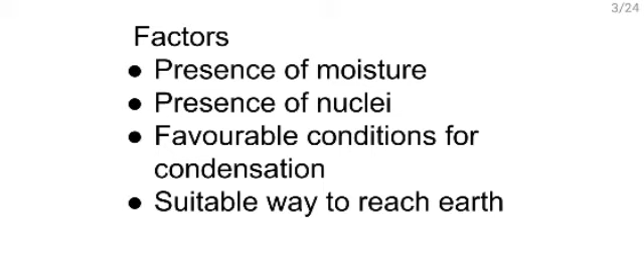This is front. I have said about favorable conditions, so one among them is front. Front means cool air from one side and warm air from the other side. They meet at a point where rain can happen - the interface of warm air and cool air. Northeast trade winds and southwest trade winds meet at some front, and there rain can happen. So we have to do weather forecasting, where people go on checking for wind directions.

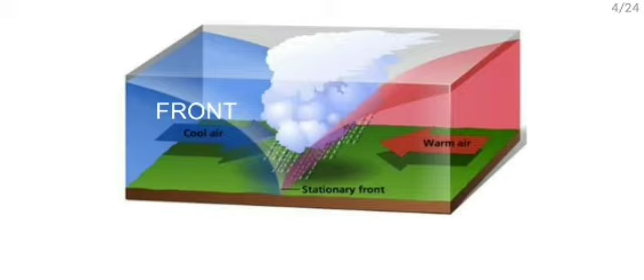Cyclone means a low pressure region or depression. At the center there is a depression around which winds are circulating. At the center, thunderstorms, rain, etc. can happen. So during our monsoon season, these depressions are formed in the Bay of Bengal and Arabian Sea, and they travel from southwest to North India as two branches - one along the western region and the other from Bay of Bengal - both meeting at Delhi. This is the monsoon, an example of a depression traveling and causing rain.

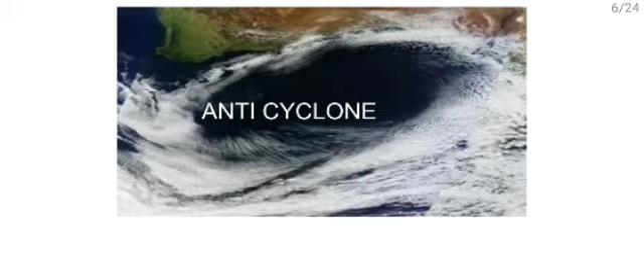Anticyclone means we have a high pressure region at the center with wind circulating. Orographic precipitation is when clouds moving with the wind encounter mountains that form a hindrance, and trees on them can make the moisture come down as rain. That is orographic.

With that, we have completed the factors. Now the whole hydrologic cycle takes place due to heat energy originating from the sun. We know the law: energy is neither created nor destroyed, so there should be a balance between the total heat energy used. Just look at where all this is used. There is heat transferred from the water surface to air, and some amount of heat energy is used for evaporation. Some heat is lost into the ground, some heat energy is stored in the water body, and some heat energy is transferred by the water flowing. So we have heat energy stored in the water body, lost to the ground, transferred by water runoff, and some used for evaporation.

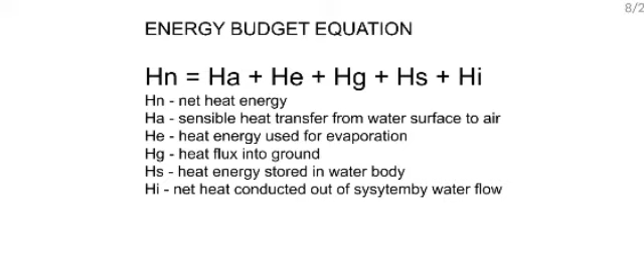This is the hydrologic budget equation - earlier we talked about energy, now mass. Mass here means water only; the whole amount of water throughout should be the same, since matter can neither be created nor destroyed. So if we take a particular area into consideration and look at the total amount of rain coming down, some is stored within the area, and the remaining we have as surface runoff, subsurface outflow, and actual evapotranspiration. So this is the hydrologic budget equation.

So I have told both of these to give an idea of where all the energy and matter is distributed. These have a prominent role in estimating the amount of rain we'll be getting, or estimating the amount that will be evaporated, and so on.

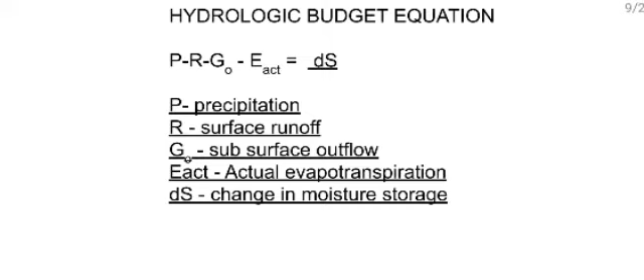Next is depression storage. We have pits all over our ground, and water stored there gets evaporated as such. In roads and all, we have none.

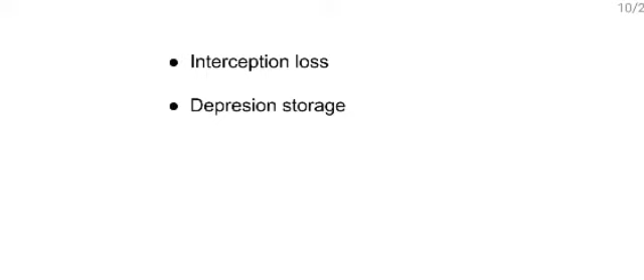Next is infiltration. We have the water quantity distributed as runoff, depression storage, interception loss, surface runoff, ground subsurface outflow, and so on. That flows through evaporation during rain or during interception loss and all. So some amount of quantity of water penetrates into the ground - that is infiltration.

In this diagram, if sufficient quantity of water is there, it will go deep into the ground to the wetting zone, depending upon the quantity of rainfall. First is the saturation zone - water coming as rain penetrates into the ground. The first layer of saturation goes to the second layer, which is the transition zone. There, water is transmitted from the saturation zone to the transmission zone, next to the wetting zone.

Wetting front - so wetting zone, wetting front - that means there should be some rock strata beneath the ground wherein this water will be collected. That interface is called the wetting front, and where the water is collected is the wetting zone. I think you are getting an idea.

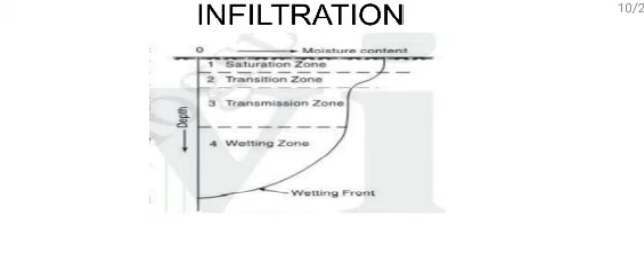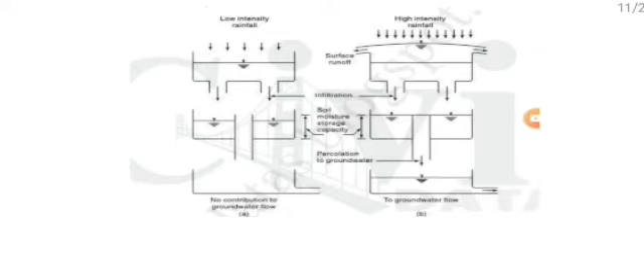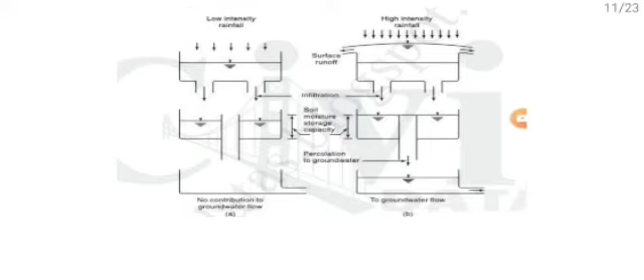Water penetrating into the ground depends on the intensity of rainfall. This picture shows how infiltration depends on the intensity of rainfall. In figure A, we have a low intensity rainfall. There, water first gets into the soil, and if it reaches the saturation level, it will move on to the transmission zone, then it is transmitted to the groundwater flow - but if the soil is not reaching its saturation capacity, there is no contribution to groundwater flow.

Next, in case of high intensity rainfall, water percolates into the soil and gets saturated. After it reaches saturation capacity, it moves to the transmission zone, then to groundwater flow.

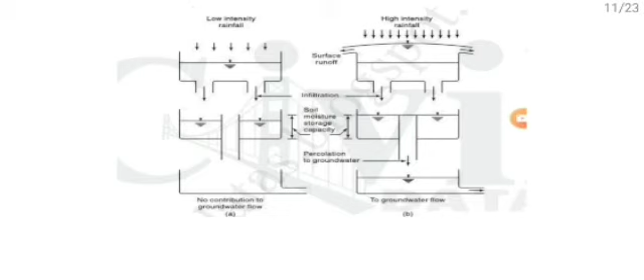Now the factors on which infiltration depends are the soil condition, vegetative cover, current moisture content, and type of soil. Soil condition means whether the soil is permeable and loose, which will allow infiltration, but if it is dense and impermeable, it will not enhance infiltration.

Vegetative cover actually increases permeability of soil, hence infiltration will take place at a larger rate. Current moisture content means, for example, if the considered soil is saturated, it will allow no more entry of water, so infiltration will be low. Then type of soil - as already said, whether it is clayey soil or sandy soil and so on - and the organic content of the soil, etc., everything will affect it.

Here, infiltration at capacity rate - so what is this capacity rate? Infiltration capacity rate is the maximum amount of water that the soil will allow to infiltrate into it. That is what they mean by infiltration capacity rate.

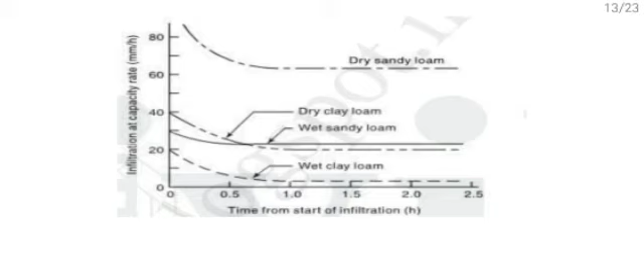Dry sandy loam has the maximum infiltration capacity rate, then we have dry clay loam, then wet sandy loam. The infiltration capacity rate of wet sandy loam is even lower than dry clay loam, because saturation inhibits infiltration. Then comes wet sandy loam, then wet clay loam.

Next is Horton's equation, a technique used to measure infiltration. There are other techniques too, but I'm mentioning this one so we get an idea of infiltration. Actually, it takes place at an exponential rate, as we've seen from the graph - with time, it decreases. So infiltration at any point of time, small fp, is Fc plus F0 minus Fc into e raised to minus kT, where F0 is the maximum infiltration.

At any point of time, that is given by small fp. This capital Fp considers the amount of water infiltrated till now, the cumulative quantity. It is important because it tells us what quantity of water has infiltrated into the soil - that is what we have to consider.

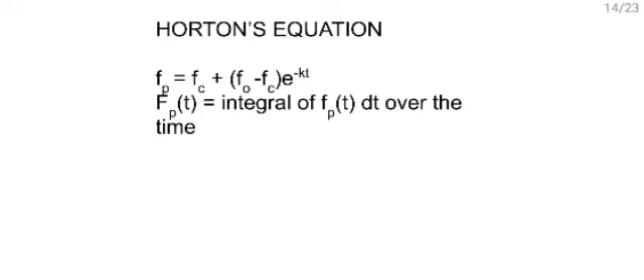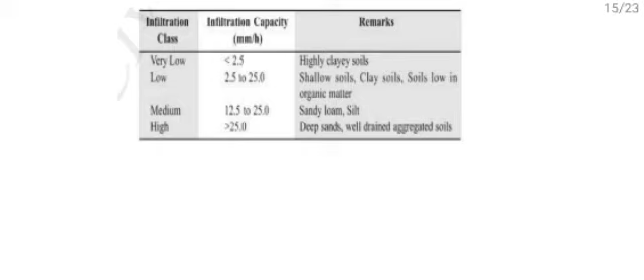Next, here infiltration capacity of different soils are given. Highly clayey soils have very low infiltration capacity, then sandy loam, then deep sands which should be well drained. So it depends on the type of soil.

Now, infiltration indices. For calculation easiness, we consider the infiltration rate to be a constant for calculation purposes, which is called infiltration indices. Based on this we usually take into calculation of runoff, etc.

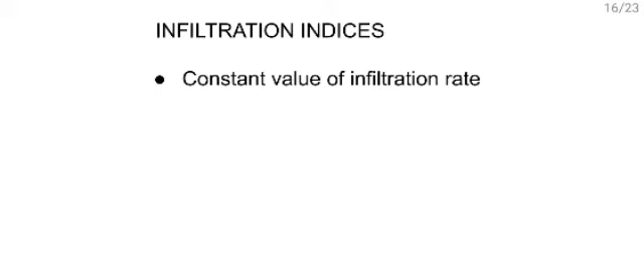Factors affecting runoff: type of soil, whether clayey or sandy loamy, and land use or cover - the vegetation available, same as infiltration. If infiltration is high, runoff will be low. In deep clay soil or saturated soil, infiltration is low, therefore runoff expected is high.

Now, antecedent moisture condition means the water quantity present in the soil before rainfall. If it is high, infiltration is low, therefore runoff is high. So the opposite of infiltration behavior is the case with runoff.

Now, runoff has adverse effects - it helps in mass debris flow, and landslides as such will occur in case of clay soil.

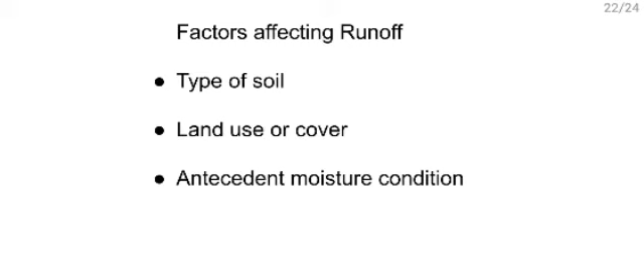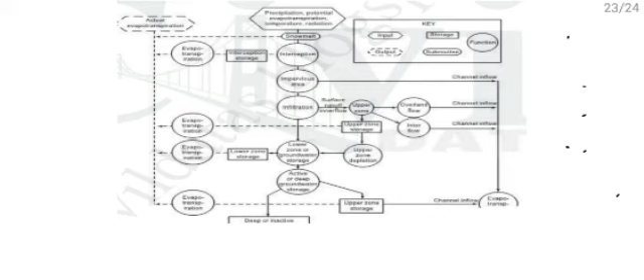You can see what stages this evapotranspiration takes place at - from interception losses, then from storage, depression storages, from lower zone storage, even after groundwater storage. From groundwater storage, plants absorb water which gets evaporated, contributing to precipitation. So this is the way you can simulate the problem of the hydrologic cycle using numerical simulation techniques.

Another important thing is soil piping, which is an after-effect of precipitation. During heavy precipitation times, there can be a change in the hydraulic gradient. This soil piping has been observed in many parts of Kerala even.

Simply, it is seepage of water through soil due to hydraulic gradient difference. That is, in dams, in the dam soil, under the structure, the concrete structure, there can be a water flow.

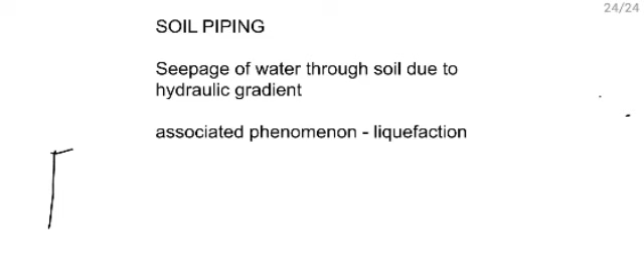See, if the exit gradient... so if I am showing you, this is the dam, water can flow like this upward. So if this is the portion where water is stored, this seepage of water like this can cause damage to the structure. So that is soil piping.

There is Khosla's step-by-step procedure to identify whether this soil piping takes place, for protection of hydraulic structures like this. We can construct a concrete structure like this, so that the hydraulic gradient is given by delta H by L, and if this length increases, the risk of this phenomenon reduces. So that is why we increase the length of the concrete structure base like this.

Now from flow net and other things also you can identify this hydraulic gradient. Equipotential lines are also drawn, so you can find delta H by L and find out whether the hydraulic gradient can cause damage to the structure.

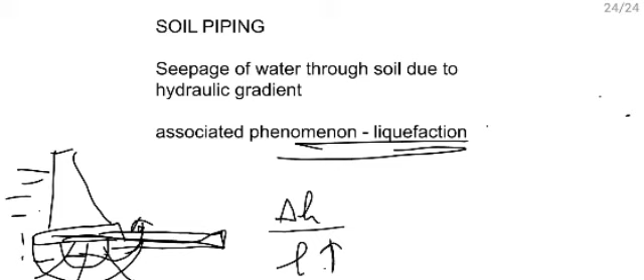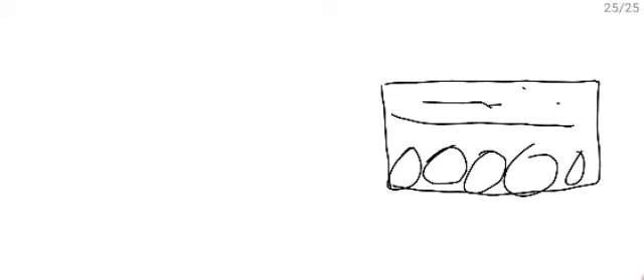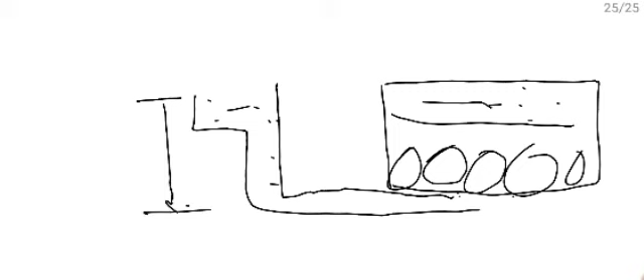I can explain this liquefaction with the help of a diagram, that is, the stage when the effective stress becomes zero. So if I am considering a soil stratum like this, then water collected above that, to measure hydraulic gradient or water pressure at this point, I have used this arrangement. This pore water pressure is basically because of capillary rise. Suppose this much height water rises in this arrangement, so that can be considered to be the water pressure at that layer.

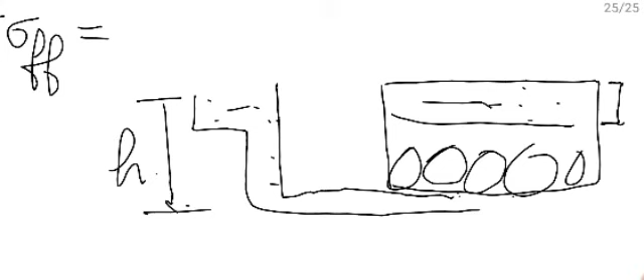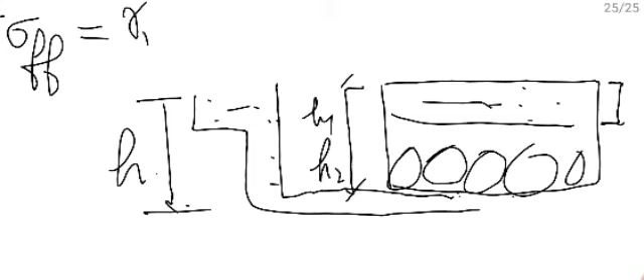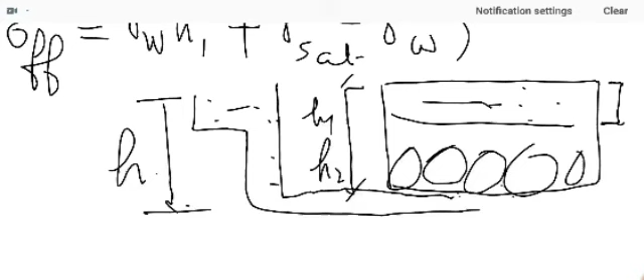Now the soil particles experience stresses due to adjacent particles as well as due to the pore water. So the effective stress, if I am considering: suppose H1, H2, we have gamma W H1, plus that of soil particles which is submerged within water. So to get that of soil particles alone, we do gamma sat minus gamma W, into H2.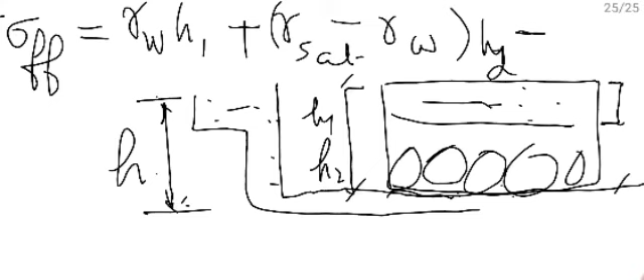So at this layer, the effective stress is this much, minus, again what? We have the hydraulic gradient, which is nothing but gamma W H from this diagram. Now this hydraulic gradient is H by L, or the total length, which is H1 plus H2.

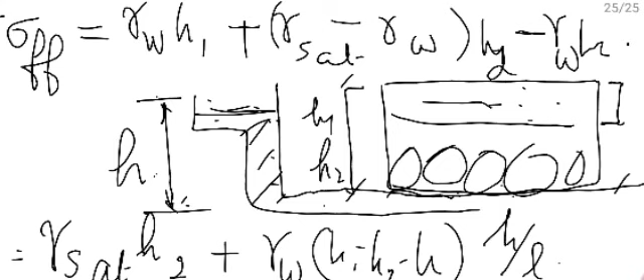So, gamma sat H2 plus gamma W into H1, minus H2, minus H. So this is the effective stress we are getting. We know H minus... so on further solving you will get that gamma sat H2 minus or plus gamma W into H1 minus H2 minus H.

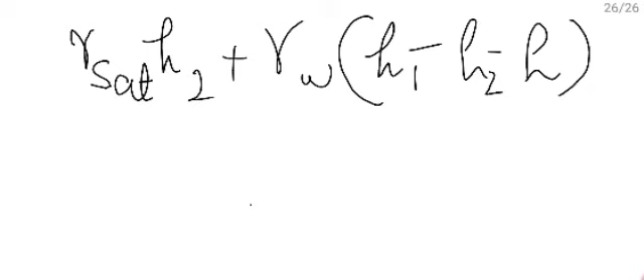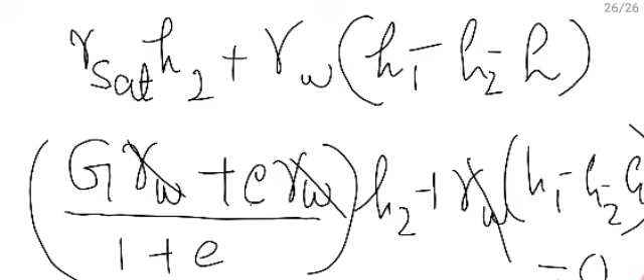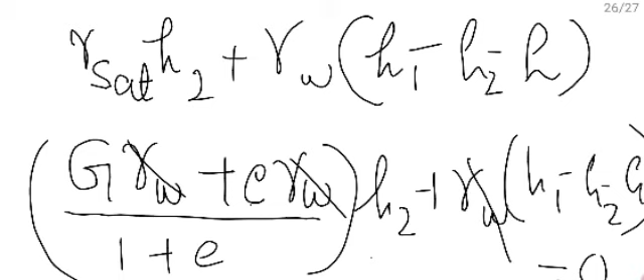Again solving, this gamma W can be equated to zero. For the liquefaction condition, we have sigma effective as zero. So therefore from this, on solving, what we get is G minus 1 by 1 plus e, is equal to H by total length H1 plus H2, which is nothing but the hydraulic gradient. So this is the condition we have to check to prevent liquefaction.

So with this I am concluding the effects of precipitation. We have considered several factors. At all levels there can have failure of slopes, leading to failure leading to landslides.